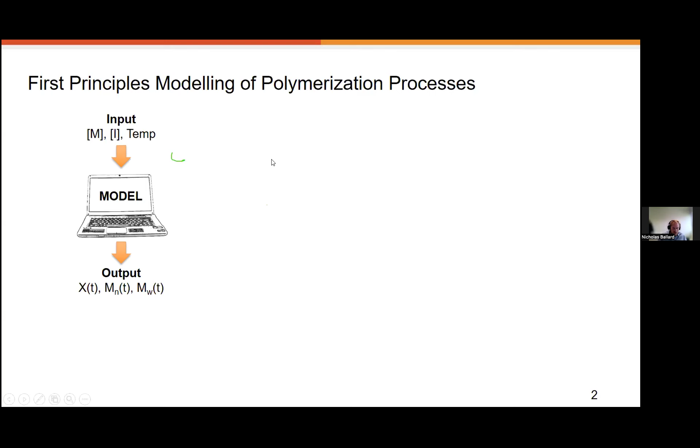And in order to construct this model in the middle here, what we're going to do, oof, I've been too ambitious. There we go. Okay, so what we're going to try and do is first get an understanding of the chemistry. Okay, so we have, in this case, free radical polymerization. We know that it takes place with initiation, propagation, termination. We put together this little reaction scheme. And then on the basis of the reaction scheme, we're going to construct a mathematical version of this reaction scheme. So in this case, we put together some ordinary differential equations. And then the model is simply solving this set of equations.

Okay. So the beauty of this way of modeling is really that you input everything that you know as a chemist or as a chemical engineer, everything you know about the system, and you end up with a model which is highly constrained to that underlying chemistry or physics.

Okay, so you have a model which is highly constrained. It only has a few parameters. In the ideal case, you say maybe one or two adjustable parameters, which you can then fit to the data. And since you only have a couple of parameters, you only need a small amount of data.

Okay? So the problem with that really is that the model that you have is only as good as your chemistry or physics knowledge. Okay, so if you omit something in the reaction scheme which is taking place in reality, the model is never going to be able to compensate for that. And so that brings me on to the alternative way of modeling, in which the framework is pretty much the same.

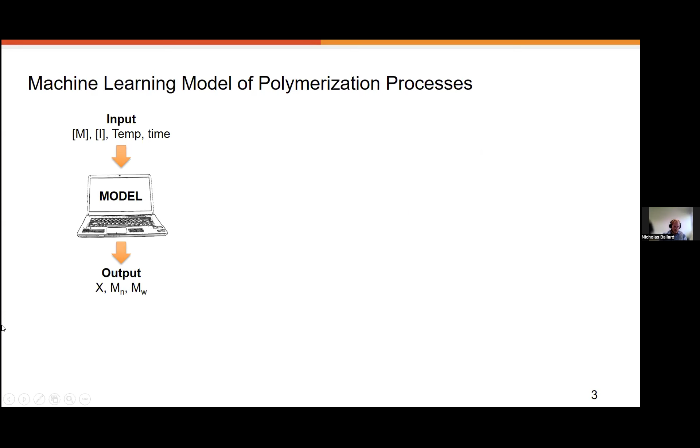So in the machine learning context, you have a model which is basically the same. Okay, so you start off with this initial framework, which is the same as we already saw before. Okay, but the model is constructed in a completely different way. Rather than inputting all of our chemistry or our physics knowledge, here we have a complete black box model. In this case, it's a neural network.

So this comes to the benefit and the drawback of this model: unlike the first principles one, which is constrained to the chemistry or physics that we have, the neural network has no constraints. Okay? It's only constrained to the data. So we have then these two contrasting ways of thinking. The model that you're putting together is trying to do the same thing, but the way in which it goes about it is completely different.

Okay, so in the machine learning world, the idea is more data. With more data, you can have more parameters. With more parameters, you have a more flexible model, and you can fit anything in this context. Okay, the first principles model, the thing that most of us would have learned during our studies, is to do the complete opposite of this.

So rather than trying to go for as many parameters as you can, this is best embodied by this quote from von Neumann, which says, with 4 parameters, I can fit an elephant, and with 5, I can make him wiggle his trunk.

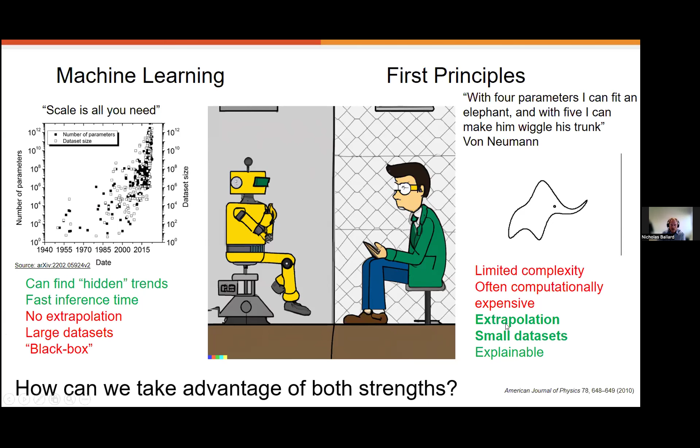And in contrast, the machine learning approach doesn't have these benefits, but it has the benefit of being flexible. It's not constrained to what we know about chemistry or physics. It can adjust depending on what it sees in the data. So when we started working on this problem, what we tried to do is look at how we can take advantage of the strengths of these two different types of modeling, whilst avoiding the weaknesses. Okay, so how are we going to do this?

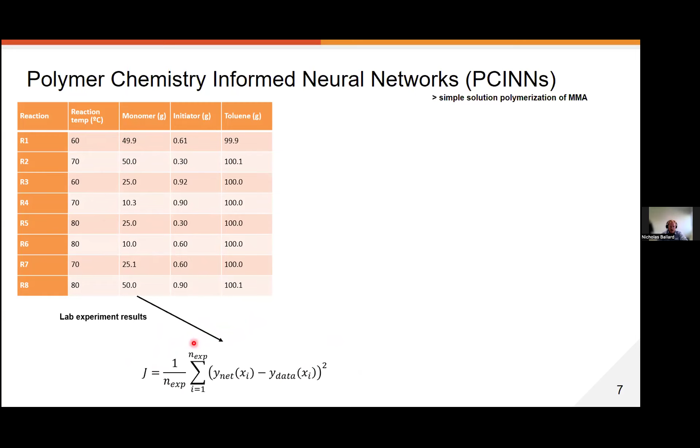But at the same time, we're going to constrain the neural network so that it also has some understanding of the underlying chemistry that we have in place. So we put together a first principles model, and on the basis of this first principles model, we can then extract certain information about trends.

So for example, we can say when we increase temperature, normally we would expect conversion to increase and we would expect molecular weight to go down. And the same thing with initiator concentration. When we increase initiator concentration, we expect conversion to go up and we expect molecular weights to go down. When we increase monomer concentration, we expect molecular weights to go up. So all of these kinds of trends that we understand from the underlying chemistry, we can then incorporate in this second term here.

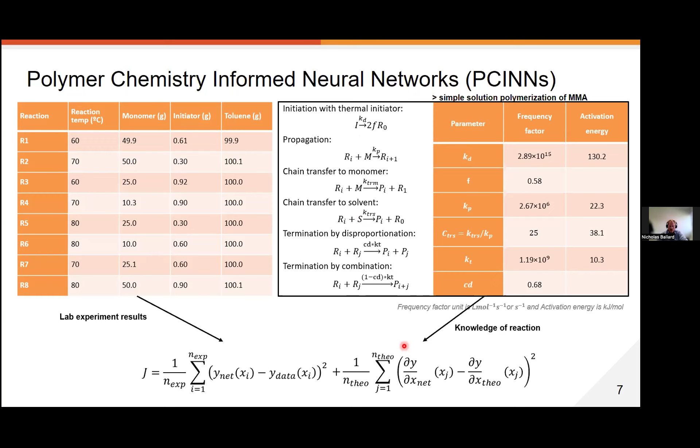So this second term says the neural network doesn't just have to fit the data, it also has to fit the underlying trends that we know should be occurring based on the chemistry that's in place. Right then, so what we did, we take this neural network. The neural network has as input monomer concentration, initiator concentration, time, and temperature. Okay, so these are the process variables that we know are going to affect the outputs.

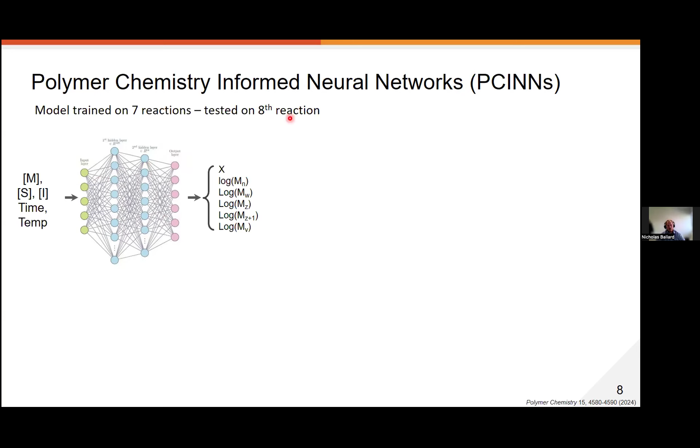And then we're going to use these process variables to try and predict conversion and the moments of the molecular weight distribution. Okay? So what we do is we take 7 of the reactions and we use them to train this network. And then we test the model on the 8th reaction, so the reaction that it's never seen before. And when we do that, what we can see is quite a nice result.

Okay, so to sum up this part, basically what we have is a system where we take an imperfect model. So it's a model where we have some understanding of the chemistry, but perhaps the parameters that we know are not 100% correct, or perhaps we've missed something in the chemistry. So we take this imperfect model, we combine it with a limited data set, and we can construct this polymer chemistry informed neural network, which offers better predictions than either a data-driven or purely theory-driven approach.

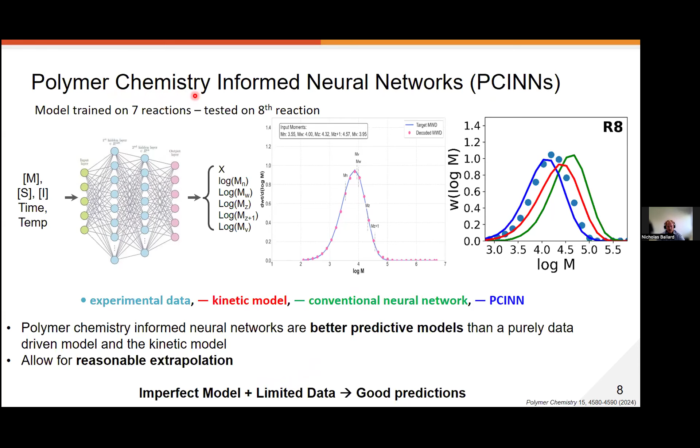Okay, so then moving on from there, one of the other main approaches that we've been trying to use in this machine learning story is to really try and take advantage of the much faster inference time of these models. Okay, so typically when I put together a first principles model, I'm happy if it runs in a minute. If it runs in 10 minutes, it's okay, but occasionally it might take an hour or even a day to run these first principles models. Polymer chemistry systems are very complex. They involve big distributions, and can take some time to solve.

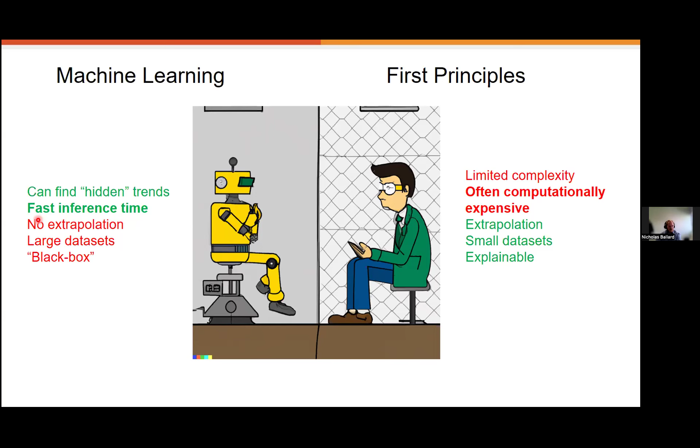In the case of machine learning, a neural network, one single pass through takes place in a fraction of a second. Okay? So in this second part of the talk, what I'm going to try and focus on is where we can leverage first principles models to generate a machine learning model, which can offer some advantages, particularly in terms of inference time. And one of the problems that we've been using this approach to try and address is in control problems. So particularly for online settings where you need a response immediately, and with the first principles models, it's simply not possible.

So let me give a little overview of the typical setup that we have. This is a problem that we've encountered over the course of a number of years. We take a measurement from the reactor, and then we want to use a model to say, okay, what's the control action that I should take in order to optimize my final product? So I'm at a certain point in the reaction. How should I change the temperature or the monomer feed rate or the CTA concentration right now in this moment so that the product that I get at the end is going to be the optimal one? So it's a problem because, like I said, first principles models can take a minute, 10 minutes to solve.

And when you're doing this kind of optimization process, when you're trying to optimize which actions you should take, it involves running the models multiple times. So since the models are computationally expensive, this can take much longer than the reaction itself. So you end up solving an optimization problem which takes a few days to solve, but by that time, the reaction is already finished.

So there's two basic approaches to this. The first one is to accelerate the model. So if you have a model which can be run in a fraction of a second instead of an hour, then this will contribute to solving this problem. And the second one is to accelerate the optimization. So if you can make this decision faster, then it allows you to really do this in real time.

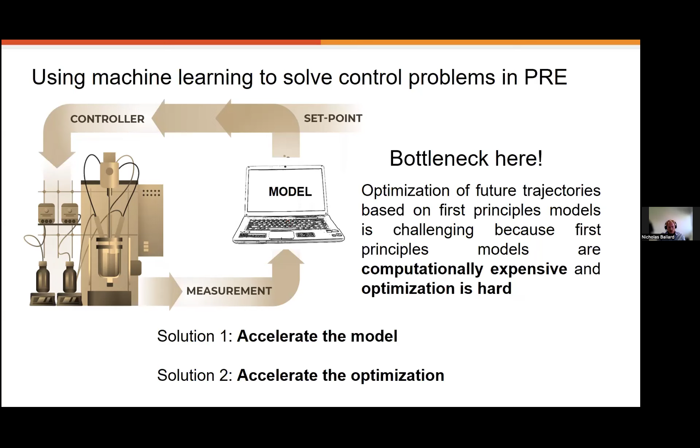So the second alternative that we have is to accelerate the optimization. And what do I mean by this? Effectively, what we have in our system is we take some sample, some information from the reactor, and we want to use that information to output what the optimal control action is. So in the normal case, like I said, this involves solving a relatively complex optimization problem using a first principles model, which is very slow. So in general, it's a very slow process.

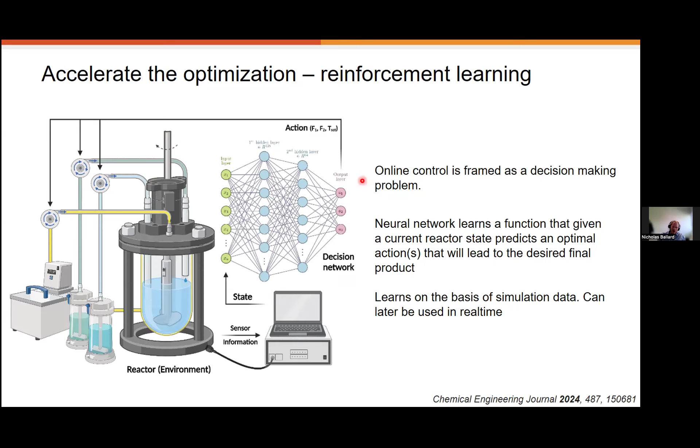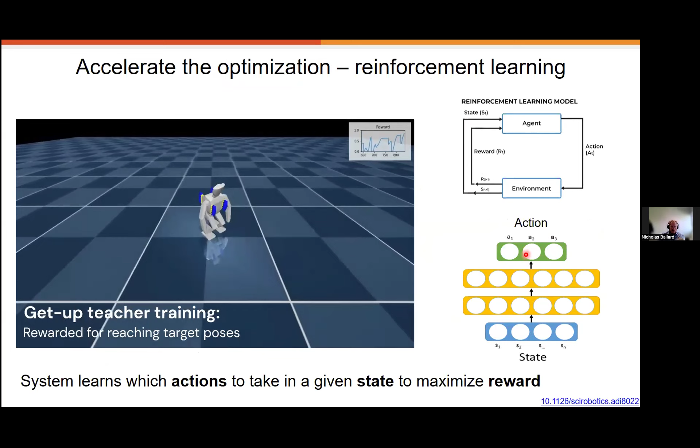So let me give you a little example here. This is an example from the literature where they try and teach a robot how to walk. Teaching the robot how to walk basically involves this robot having information about the current position of its limbs, and it needs to then make a decision about which actions to take. So if it's trying to learn how to walk, it needs to know that you can't move both legs at the same time. First, the left leg needs to go, and then the right leg needs to go.

So the process here becomes one in which the system is constantly interacting with the environment. It's constantly receiving information about the position of its limbs, and it constantly makes decisions about what to do next. And when it takes a decision which it sees is good, so in this case, for example, it's trying to learn how to score a goal in football, when it makes an action which results in a goal being scored, it learns. The parameters in the model are adjusted so that in future, that same action is promoted.

So in that way, the positive actions that are taken are reinforced. So it learns to repeat those actions when it's in a similar state. And the negative actions, which result in it falling down or something like that, are then prevented in future. So it's a process of constant iteration where the model is interacting with the environment.

In this case, it's this simulation of the robot, and over time it is learning which are the actions that I need to take in order to optimize my end goal, which in this case is learning how to play football.

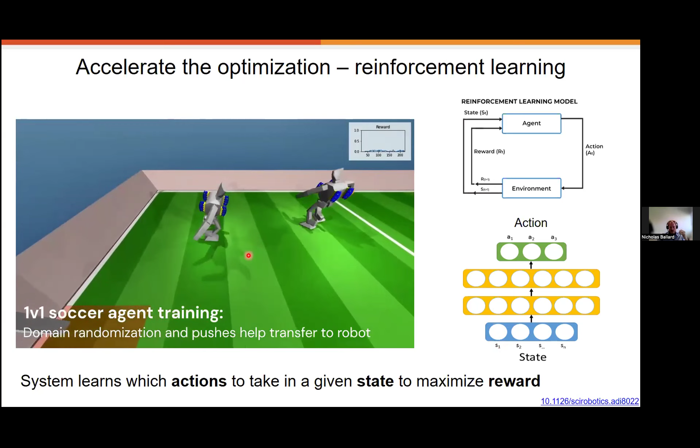Okay, so we're going to set up the same thing in our polymerization system. So what we have is an emulsion polymerization of butyl acrylate. Okay, so this is what's going on in the reactor here. And at certain times, the system is going to receive information about the state. So the state of the reactor in this case, in terms of conversion, the amount of monomer fed, the molecular weight distribution, which we approximate by a method which I'm not going to go into detail here.

And it then has to learn which actions to take in terms of the monomer feed rate, initiator feed rate, and reactor temperature. And it's going to learn which is the optimum action to take on the basis of matching the final target molecular weight distribution, which is this one here, which we obtained from some reference process. And it's going to try and do so whilst minimizing the reaction time and ensuring that the reactor is in safe conditions. So in this case, this is simply avoiding very high levels of monomer in the reaction.

Okay. So like I said, we have this process of constant interaction with our simulated environment, so our simulation from the first principles model. And at the beginning, the system doesn't know which actions to take, so it's making very bad decisions. For example, it's deciding to never feed in the monomer into the reactor, and then you never have any molecular weight distribution. Or it's feeding all of the monomer in at the same time. Concentration of monomer in the reactor goes so high that it becomes dangerous.

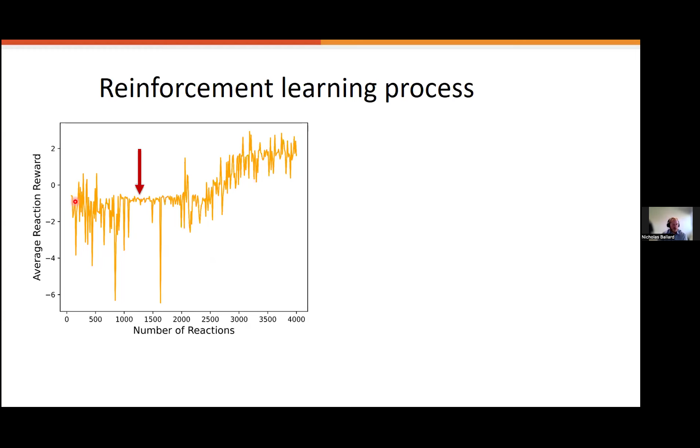Okay, so towards the middle, it starts to learn how to put a series of temperature and monomer feed rates into the system so that the molecular weight distribution that we target is approached. And by the end of the training, so after a large number of simulated reactions, it really learns an optimal control strategy, which both gets the molecular weight distribution that we want, but also does it in optimum time. Okay, so the original molecular weight distribution for this process was obtained over the course of 4 or 5 hours or so. And in this optimal control process, the system has learned autonomously to do it 50% faster than that.

Okay, so that's all I have to say. So what I've tried to do is give a kind of overview of where we can use machine learning, leveraging the first principles models that we have. Hopefully I've shown you that we can use these to make good predictive models, which are not only constrained by our underlying chemistry, but also have a data-driven component. We can use them to accelerate computation, so we can make machine learning models that are very close to reproducing the first principles models, but orders of magnitude faster in time. And we can also use them to solve very challenging control problems using this reinforcement learning approach that I've discussed at the end there.

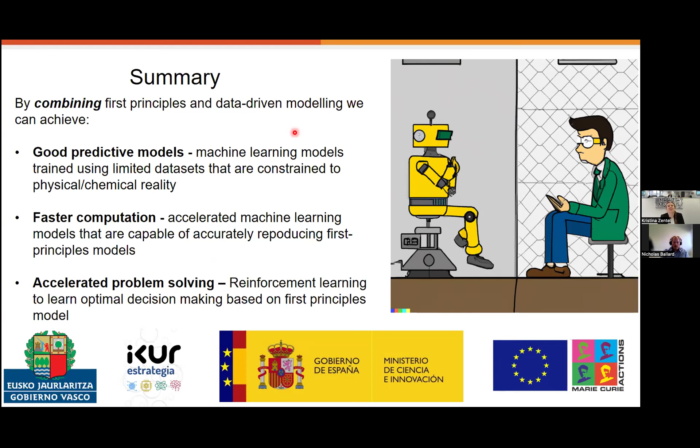No, in this case, we're just using the output from the simulation. Maybe if I can go back on this. So it's one of the things that we're looking at trying to improve now. For example, if you look at the x-axis here, this says that we need 4,000 simulated reactions in order to reach the optimum control strategy. So 4,000 simulated reactions in this particular case, it really takes quite a long time to learn the optimal solution. Once it's got there, it's rapid. It can be implemented fast, but it takes a long time to get there.

So one of the things that we're looking at is using, for example, machine learning systems in place of our first principles model. So in that way, still there will be 4,000 simulated reactions on the x-axis here, but in terms of time, it will be orders of magnitude improvement. So this training process, I think, takes a few days, but we could probably decrease that to a couple of hours if we implement some of the other ideas that I showed in the talk at the same time.

Yeah, really, really nice. So if you use this trained model now and you give it a different molecular weight distribution, will it again need 4,000 reactions to learn, or will it then be faster? No, the same. It will need to be trained from scratch again. So it will again take a few days to train from scratch.

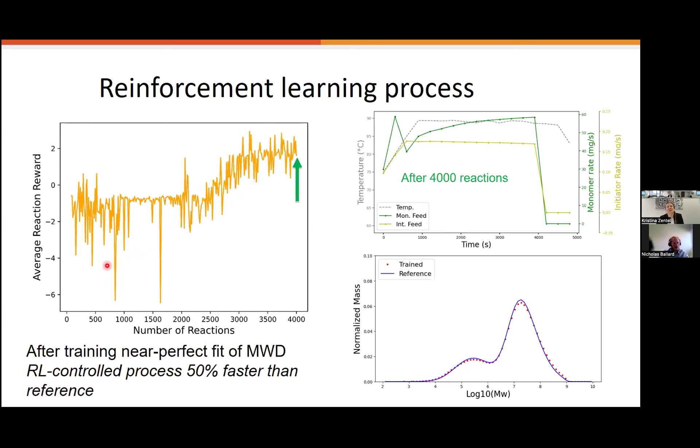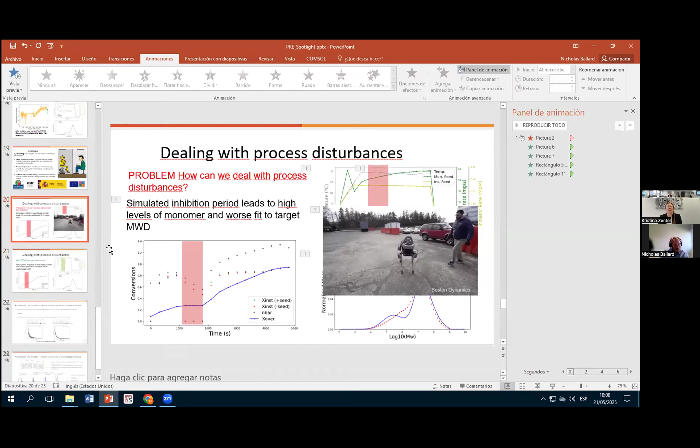Yeah, I have a slide on this, but let me see if I can. Okay. You can see the slide now? Okay, yes. So let me go back here. I'm gonna unhide these. I didn't deal with these for time, but

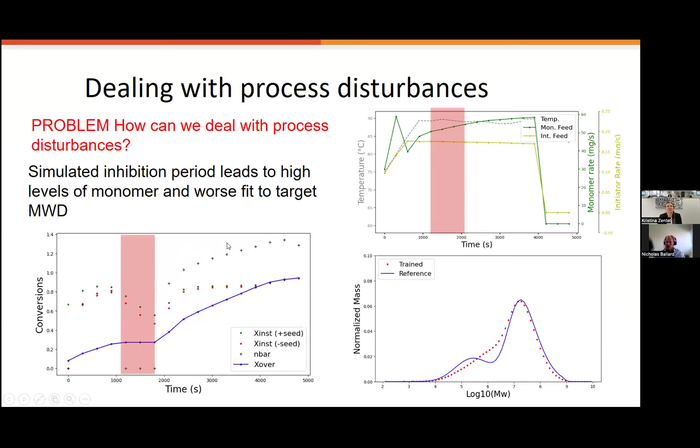basically in the form in which I've shown it in this presentation, it wouldn't be able to. So it learns based on what it's seen in the past, and if it never sees those process disturbances, when it gets exposed to them, it also makes bad decisions. So in this case, when we've never exposed it to any process disturbances, we simulated in the middle of the reaction here a little bit of inhibition, and the system didn't make any change to the control strategy. So it didn't respond properly.

Then the next question has maybe already been targeted a bit. Sebastian Fries is asking, how flexible is the reinforcement model when the starting conditions of the reaction change? Yeah, so again, if it's never seen that during training, then it struggles to adapt to those kind of things. It's kind of a good and a bad thing. Once you know which kind of things you want it to be able to learn to overcome, generally it can do that. So in another example, we expose the system to different initial seed.

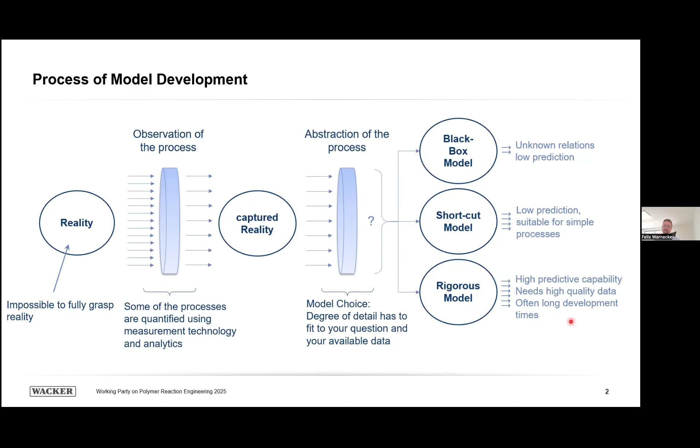Yeah, this is a rough categorization of models. I think we have heard today that there are also other options with artificial intelligence. I want to talk about first principle rigorous kinetic models, which have in general a high predictive capability. But if you want to train these models and have valid kinetic parameters, you need a lot of high quality data, and often you have a long time to develop these models.

So if we take a look at a typical model abstraction for emulsion polymerization, you will at least have these sub-processes here. You will always have an aqueous phase and aqueous phase kinetic reactions going on here. You will also have your polymer kinetics in the particle phase. And these phases are connected by different diffusion processes, for example, for the radicals or oligomers, and in addition, phase equilibria, which distribute, for example, the monomer over the phases.

So in general, emulsion polymerization is a complex process, and you will always have a lot of sub-processes and therefore a highly complex model. Today, I want to talk about the radical formation in the aqueous phase. So this was the focus of our project, to have a better prediction for this part here and to successfully embed this in already existing thermodynamic kinetic models we develop.

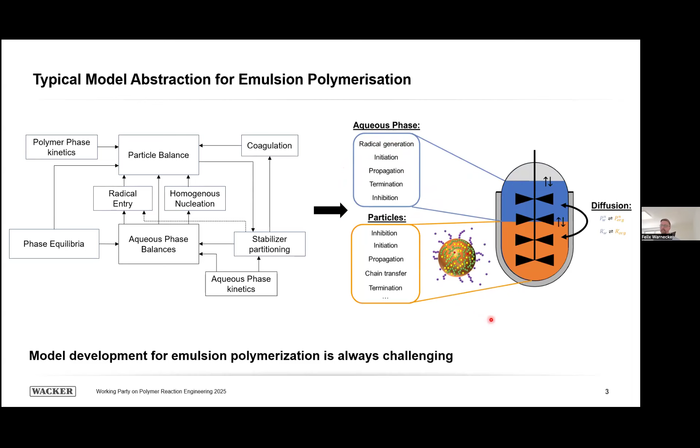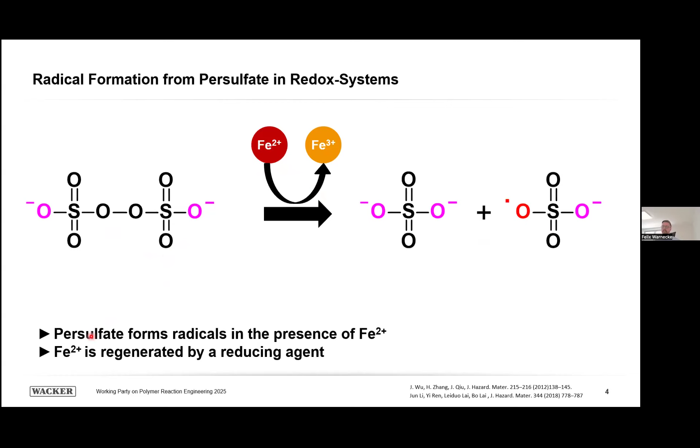So now coming to our example. The redox system has mainly two parts. The oxidation step, so the persulfate reacts with iron to form radicals. This is a reaction running very quickly. And to keep this reaction running, the iron has to be regenerated by a reducing agent.

A commonly used reducing agent is ascorbic acid. Ascorbic acid is a very complex molecule. You will have a lot of complex intermediate steps. So this is here just for simplification to talk about the modeling. But in general, if you take a look at the literature, you will have at least two regeneration steps for iron by ascorbic acid.

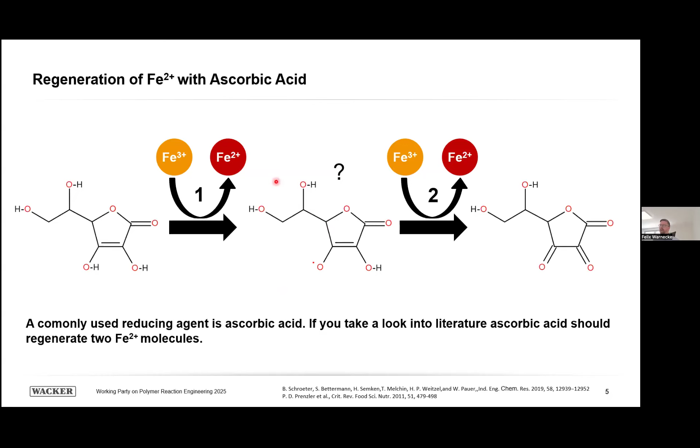So our first model candidate that we wanted to test was this oxidation reaction in combination with the regeneration of iron from ascorbic acid, followed by further consecutive steps of our already existing kinetic models. So we have these three reactions here, oxidation and two times regeneration, and we tried to do some experiments to get access to these kinetic parameters. In a first step, we started with aqueous experiments.

So we tried to reduce complexity from the emulsion system, and we wanted to get access to the composition of the initiator components. So we prepared an aqueous solution of potassium persulfate with iron, and at some point we added the ascorbic acid, and with Raman spectroscopy we could track the consumption of these components, as you can see here in the figure. To get access to the signals, we had to work with increased concentration levels, so in the range of 1 to 3 weight percent of potassium persulfate in an aqueous solution.

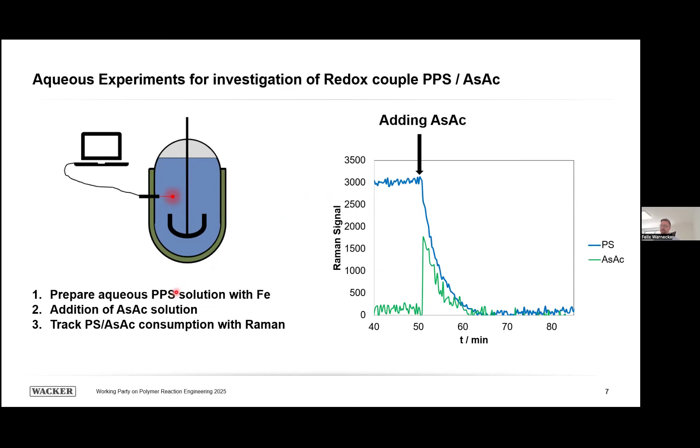In the next step, we did some variations. For example, we did a variation for the iron concentration. As you can see here in the figure, this is the consumption of the persulfate. The redox system will speed up if you increase the concentration of iron. Another observation is that if you increase temperature at a fixed iron level, the reaction will also strongly speed up.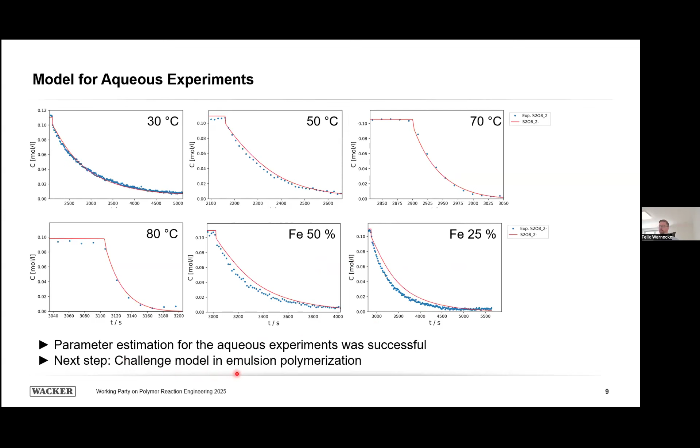Therefore, we switched to an emulsion polymerization system with vinyl acetate as monomer, PVOH stabilized, and we developed a recipe with a solid content in the range of 55%. The drawback now is that we have no more direct access to the initiator components because the concentration level of the initiator is simply too low. So instead we can track the monomer conversion in form of the solid content in our case. So we still wanted to stay at our initial model and take a look how it performs.

But first, one thing I want to mention is that data quality is extremely important if you want to do kinetic modeling. So in order to get access to the monomer conversion, we had different approaches. One approach is to set up an energy balance and calculate the heat of reaction and convert it into a solid content. So we did this energy balancing for our 2-liter lab reactor.

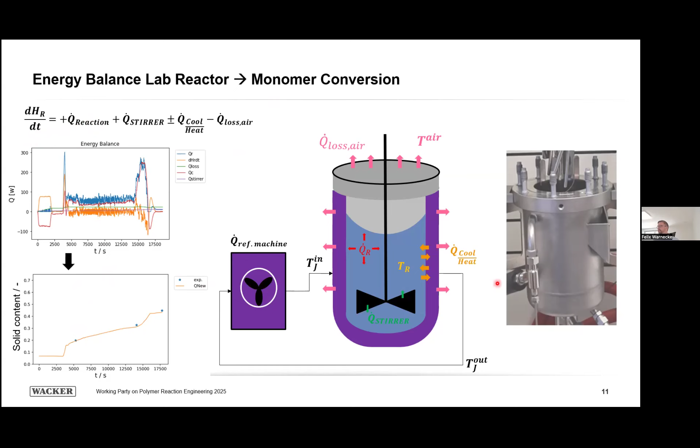Another way to get access to the monomer conversion is again Raman spectroscopy. So as you can see here, the signal of the vinyl acetate monomer is shown here, and the signal of the vinyl acetate in polymerized form is shown here. In the intermediate range of conversion, we have overlapping peaks. So this is not a perfect situation, but it still is working quite fine.

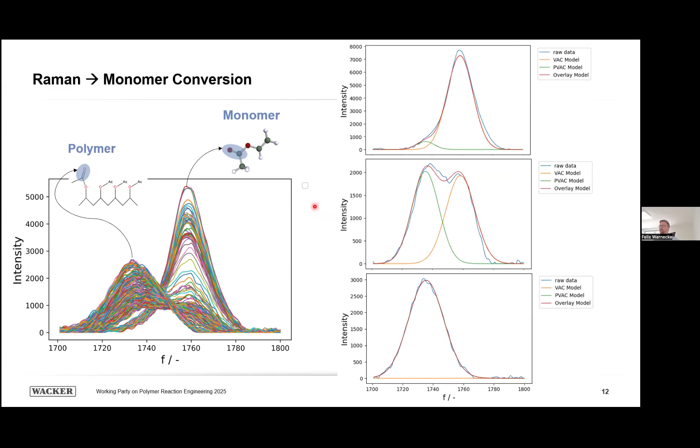So again, data quality is extremely important if you are doing kinetic modeling. So I recommend you should always validate your experiments and check for the quality before you start with a modeling project. So what you can see here is the solid content from different sources. In blue, you can see the Raman signal. Green shows the energy balance. And these orange stars are an offline sample where we analyzed the solid content by weighing and drying the samples.

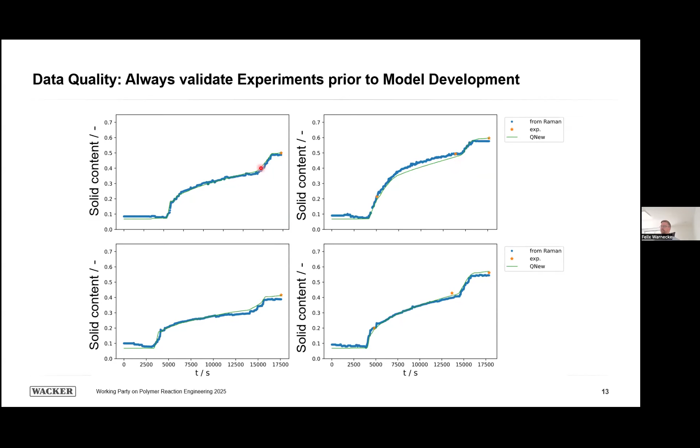So now coming to the experimental results of our variations of the redox system in emulsion. And the first, a little unexpected result is that if you increase the iron concentration in your system, you will see a strong decrease in reactivity. And our interpretation for this is that iron has a negative impact on the radical efficiency. And if you take a look into literature, you will find the assumption that iron 2 is not only working in the redox system to speed up your redox reaction, but it will also destroy your sulfate radicals. So you have to choose the concentration carefully.

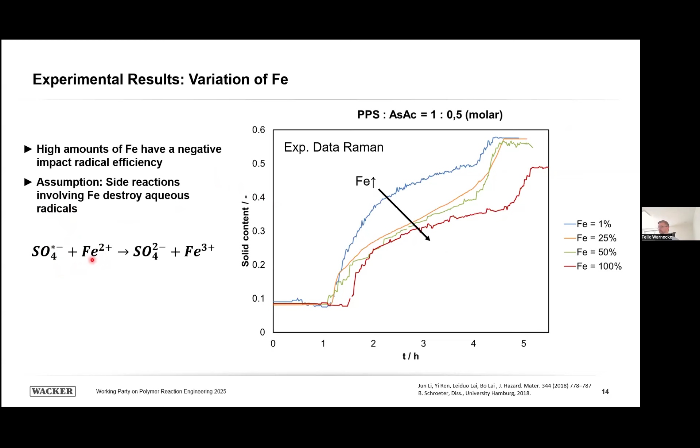And another observation was that if we increase the ratio of ascorbic acid compared to the persulfate, so not the stoichiometric ratio, but go away from this for lower ratios or for higher ratios, we will also see that an increased amount of ascorbic acid has a negative impact on the radical efficiency. So the question is also, why is this happening here? So we did some variations, collected some data, and then we started the first modeling approach.

And here you can see this is the stoichiometric ratio for persulfate and ascorbic acid, at least related to these equations here. And you can see if we adjust the kinetic constant for the radical losses, we can describe the solid content here with the blue line quite fairly. But if we change the ratio of persulfate and ascorbic acid, the model strongly fails to predict the solid content. So here we have an under prediction of the solid content with low amounts of ascorbic acid. And for high amounts of ascorbic acid, we have an over prediction of the solid content. So our model fails and we had to revise our assumptions.

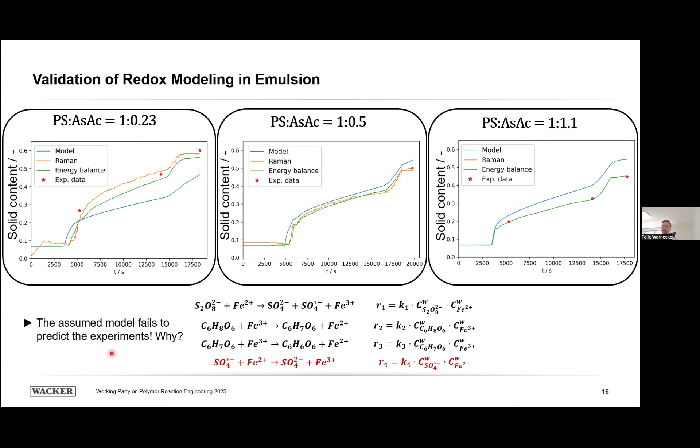And if you take a closer look in the literature, you will come to the point that ascorbic acid is more complex, and it seems like the degradation products of the ascorbic acid, for example, the oxalic acid, but it can also be some other component, we don't know that for sure, will also act as a reducing agent, and so we have further reducing potential here if we add 1 mole of ascorbic acid. So our approach was to add another generic reaction to depict this observation here.

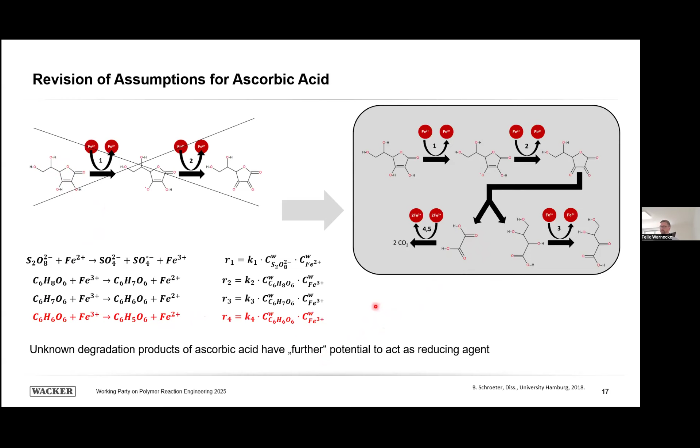Another unexpected observation was that we have also tried to do some thermal polymerization with potassium persulfate, and the reaction was running quite okay. The start was not that fast, but once the reaction was running, the batch with thermal decomposition of persulfate was running quite fast. And this was in contrast to the literature constant, because we have also tried to simulate this before with the constant from literature, and with this kinetic constant, there was nearly no solid content formation, because the literature constant says that the decomposition is very slow.

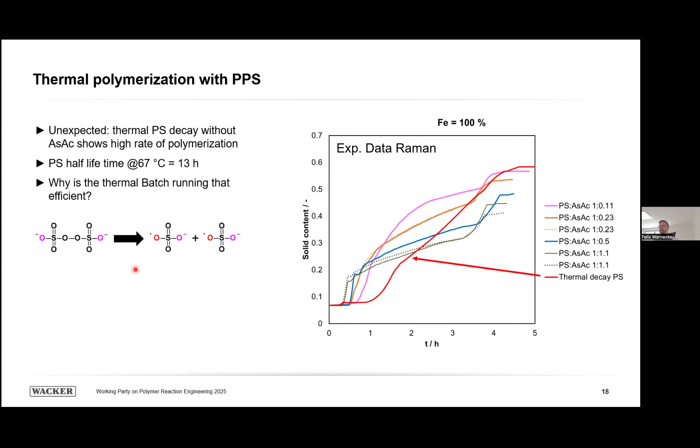So we took a closer look at the thermal decomposition as well. So this is here the kinetic constant from literature for the thermal decomposition. So for low temperatures, it is really very, very slow. You will have to wait for hours to get a conversion of the persulfate. And we tried to validate this kinetic constant with our aqueous experiments and checked that it was okay. We did these experiments at 90 degrees and we could validate the kinetic constant from literature.

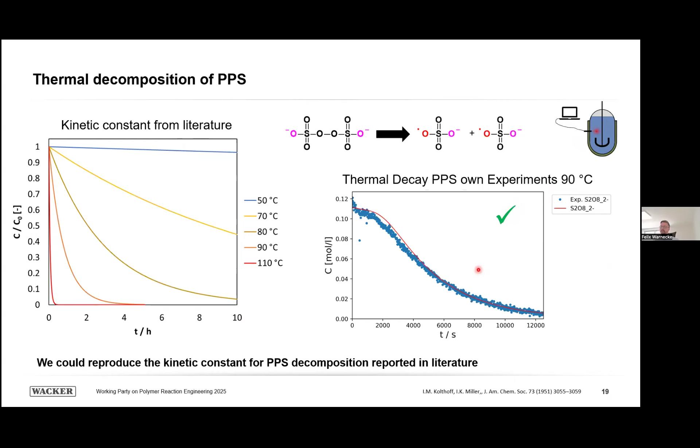And if you take a look into literature, we are not the first ones who have observed this phenomenon. For example, at 50 degrees C with vinyl acetate, in literature it's reported that the thermal decomposition is 50 times higher than the constant for aqueous solution without monomer. So this is in good agreement with what we have observed.

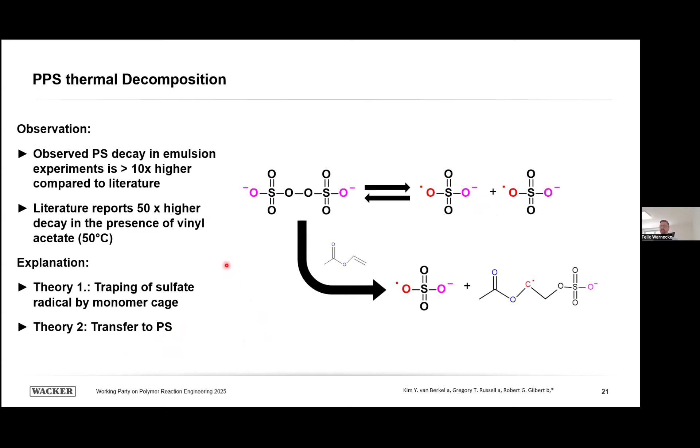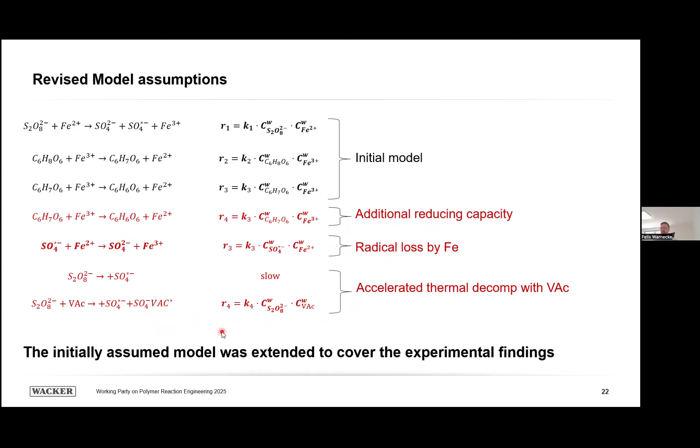So we had to revise our model again. Our initial model with the 3 reactions was extended with 1 reaction with additional reducing capacity for the ascorbic acid. We also had to add these radical losses by iron. And additionally, we also had to add the accelerated thermal decomposition in the presence of vinyl acetate. And with these new assumptions and the strongly more complicated model, we were able to regress kinetic parameters that can fit different observations for different persulfate to ascorbic acid ratios and also the thermal decomposition.

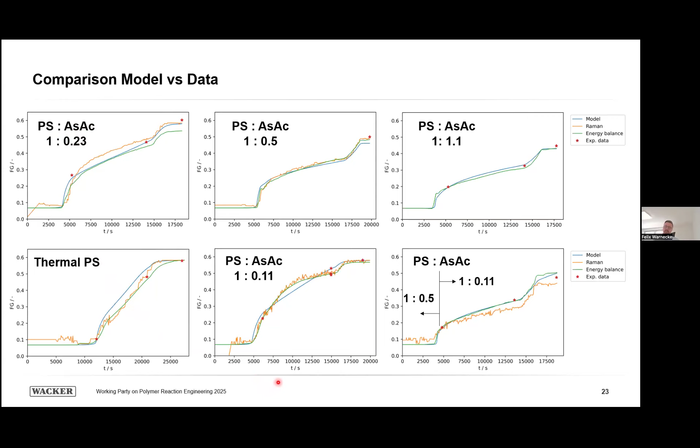So this is a first step. We could describe a couple of observations. But of course, we are not done here. There's still a lot of things to do. But I hope I could show you that the initiation in emulsion polymerization is a complicated topic. And our opinion is that in literature, it is often not really treated with the appropriate importance because it has a really strong impact on your process. And we think that understanding the initiation is essential for the model development because you will always have this interaction with all your other kinetic parameters.

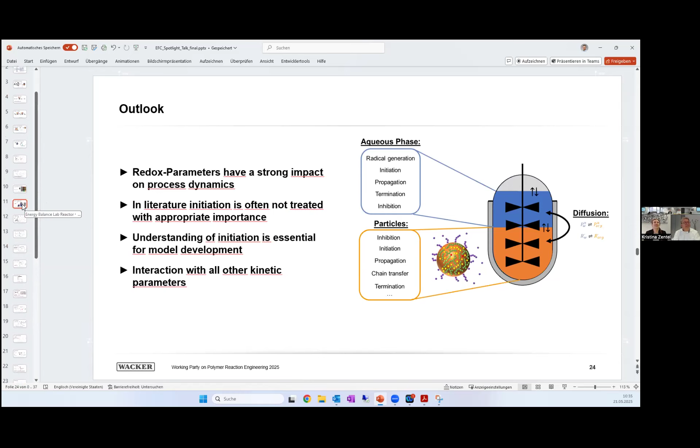In the meantime, I'm interested in having a first question myself. I really liked how you put effort into validating your experimental conversion with the different approaches. You showed the energy balance as well as the Raman results and also the overlapping of the peaks. I was curious how you dealt with that, because I think the results are in very good agreement with the energy balance model and also the offline analytics. Maybe you can elaborate a bit on how you work with the peaks. For the Raman? Yes, this one exactly.

Okay. So we have a lot of spectra here. We take a spectrum every minute, and for every spectrum, we are doing this regression of the peaks to fit the raw data signal with a fixed position, more or less, of the middle of each peak. The optimization has only a very low window to shift the middle of the peak. Okay. So you did a deconvolution of the peaks, right? Yes, from some data we know quite well where the maximum of the peaks is, and this was our reference where the peak should be. So we do not allow the peaks to shift too much, because then you will have some quite strange optimization results. But if they are fixed more or less and can only shift very small amounts, then you will get quite nice results.

Thank you very much. So I think we have a question from Nick. A very interesting approach to a very hard system to try to analyze. Ascorbic acid and KPS by itself is also a redox pair. Is there a reason that the reaction between these two can be ignored?

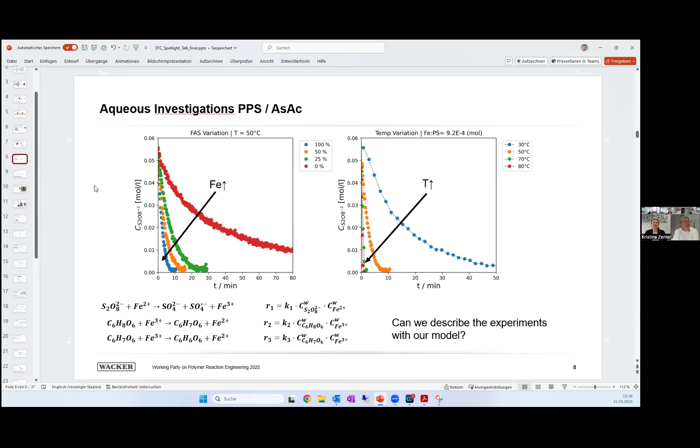If you go back to the spectra you had before, you could see that you have a nice curve with conversion, but you have not a direct isosbestic point, so you have some side effects in between there. But what could also be done instead of the fitting procedure is there are some routines in spectrometer software that do a half band integration from the individual peak maximum towards the baseline. And if you would take the half band to the higher and the lower wave numbers respectively for the individual peaks, it could also give a nice result, because under these circumstances the half bands are free from side effects.

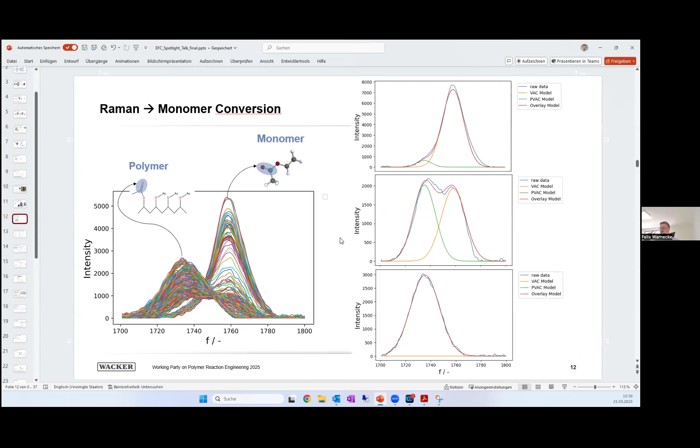Okay, yeah. Thanks for the comment. One thing maybe is important to mention here: with increasing degree of polymerization, both peaks will strongly lose intensity. And what we did here, we were always working with the ratio of the peaks. We have a fitting parameter here, and we're working with the ratio. If we did not do that, we would not have this good information, because fitting for concentrations in emulsion polymerization is nearly impossible. Yeah, that's true. And taking the ratios is extremely helpful.

The other thing you have to watch is that you are still in the linear region of the detector, so that the intensity is not too high when covering a broad range of conversion, specifically in the infrared or near infrared. Sometimes you run into these problems, but it helps if you switch to the next overtone. If you're going too high in concentration, you switch to the next overtone, and the fortunate thing about the overtones is that the peaks diverge, so they spread more; not the peak basis, but the peak maxima move apart from each other.

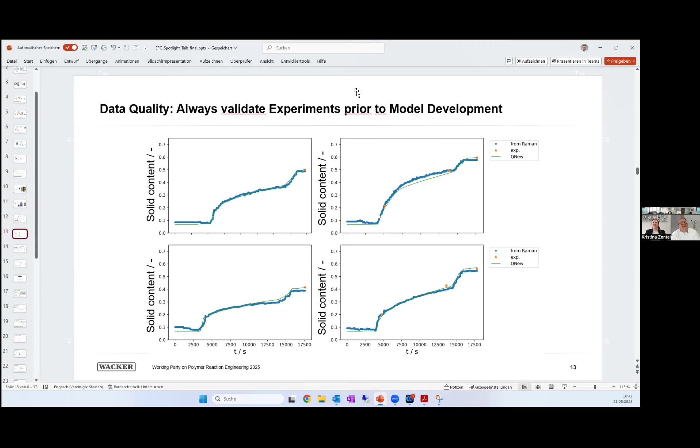Okay. I was working too long in a department with infrared and near infrared spectroscopy. Sorry for that. Okay, so I think we do not have any more questions from the audience.

So Felix, thank you very much for your very nice presentation and the insights into the radical formation and efficiency. You're welcome. Over to the last speaker of today's Spotlight talk, which is Markus Busch. He's working in chemical engineering at the Technical University in Darmstadt, where he is the head of the high pressure polymerization technology labs, working with alpha olefin polymerization, specializing in LDPE, high pressure polyethylene and copolymers. And he will be presenting about bridging the scales in this area.

And so with this, I think we can hand over. Let's share our screen. So now please someone else from the panel can maybe let us know if this is working. Yeah, looks good. Perfect. Thank you. Welcome, and sorry, I'm rushing in late. There are other appointments within the university, but I'm happy to join here

and to talk about how to transfer the scale from the lab to large-scale application. To give you an idea what we are talking about, we can look at this picture. The typical thing in high pressure labs, but also I think in many of your labs, is that the cell size is about 1 milliliter or something like this. So this is a typical high pressure cell. We are running a few mini plants, and here you can see the reactor; the volume is about 100 milliliters.

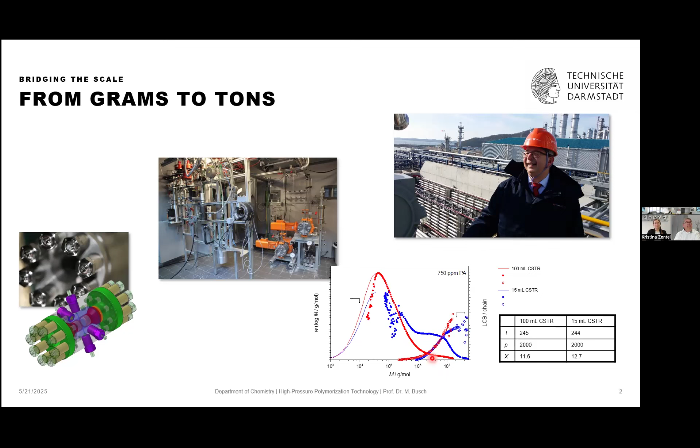And what I'm now starting with is not really a new thing. You see here 3 publications that are reaching back to the past. And the point is with these publications, but I could have also cited Archie Hamielec or Harmon Ray. So these are the fathers of our field, meanwhile, maybe grandfathers. But the basic ideas have been very visionary and they are still holding. So if we are a little bit critical with ourselves, we are all working on old ideas and old stuff.

I'm personally very related to these because my first job interview on a habilitation position was running like that. Do you know these 3 publications? No? Read it. I would like to discuss it with you in half an hour, and that was Karl-Heinz Reichert. And he brought to me the idea about

taking up the idea that on the one hand, polymers are product by process, and on the other hand, the basic idea, the molecules growing do not know about their environment. If we have laboratory experiments, synthesis conditions, a synthesis strategy, or process conditions, we have a kinetic model. It should be the same in any case, and we would get reaction rates, so all the parameters for productivity, we would get molecular properties, and they are the detour to applicational properties. And so this is the basic idea.

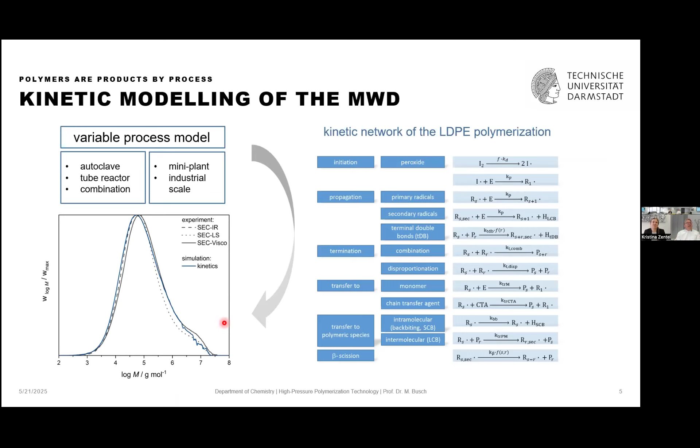But nowadays, more or less all the groups working in that field converged somehow to apply a hybrid of kinetic simulation that is good for the process dealing with ODEs, with the Monte Carlo process as a hybrid on top of that, saving a lot of computational effort by relying on the reaction frequencies from ODE modeling and generating the molecular structure that is again transferred to other models that deal with rheology and application properties.

And the good thing with this is that you have a modular toolbox which you can fit together individually. Here the interface is the reaction rate, here the interface is the molecular structure. If you put the interfaces right, you can also switch in between these models, and it is getting very versatile. On the other hand, it is directly following the old idea: reaction kinetics are generating structure, and the structure is generating applicational properties, and that's working pretty well.

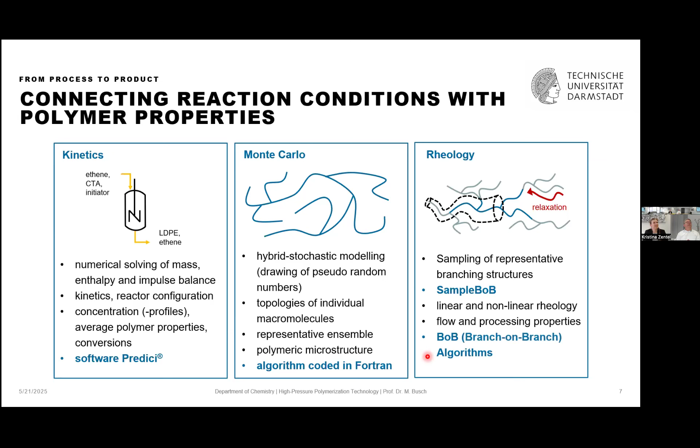And some kind of irony: before, groups were discussing which is the more fortunate way to go. Meanwhile, we are all converging to this approach, and this shows the interaction in science is a good thing, and that we move forward. And that this is not only a dream and a vision, you can see here the molecular weight distribution between experimental data and simulated data.

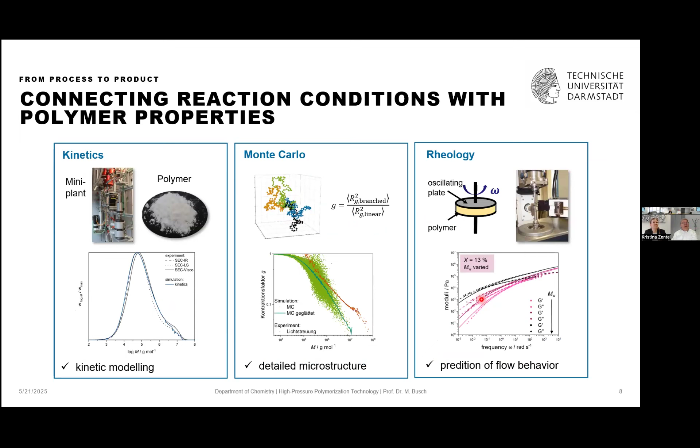You can get into the Monte Carlo process, generating a structure and deriving from that structure the microstructure and application properties, and you can go into rheology and see what is happening there and what application properties are doing. And if you do so, and Kristina is working quite in detail with that, for example, you can have also validations.

So no model is good. Modeling is nice, but it is nothing worth without a proper validation. Otherwise it is just fitting, and for fitting you need a pen and a piece of paper, and that's it, plotting the data points and drawing a line.

But if you validate it in an independent set, then, for example, here you take the microstructure, you take the random walker, you evaluate the space a molecule is occupying, you look for the contraction factor, so the relative space to a linear chain that is occupied with respect to molecular weight, and you can see that you have the Monte Carlo process here, you have the experimental data over here, and you have the simulation over here, and you see you can get it to nice agreement.

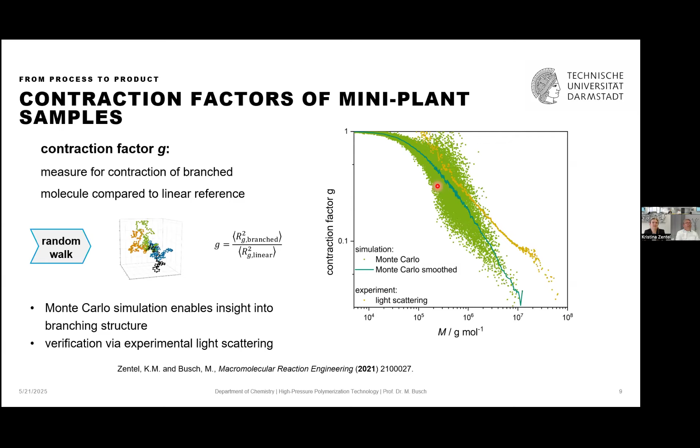And that's basically the very first elementary concept, that if you have a proper model, if you have a proper set of rate coefficients, then you can describe, independent of what you do at different places in different reactors, your application properties or your properties of the polymers, and that's an important thing. So if this is really true, then you should look at different reactor technologies.

And the fortunate thing, aside of that, we have an additional playground, pressure, in our system. We have a technology at hand where two major directions of reactor technologies are implemented. So it's a multi-zone autoclave that's going back to the ICI licenses, and it is a multi-zone tubular reactor that is going back to BASF licenses. And at the end of the day, the nice thing with this is that these two reactor technologies, due to their back mixing characteristics, deliver very different products in terms of application properties.

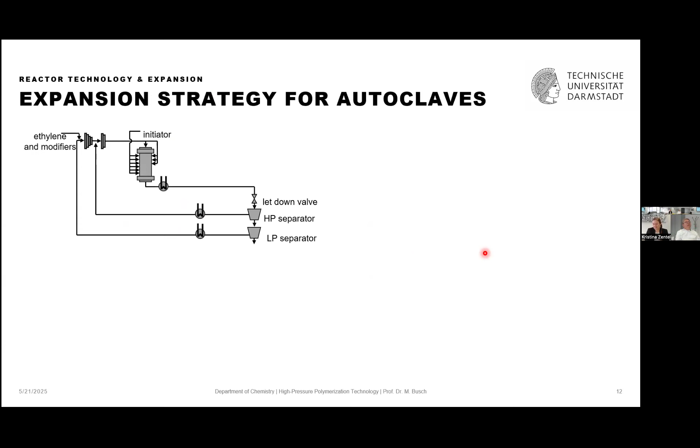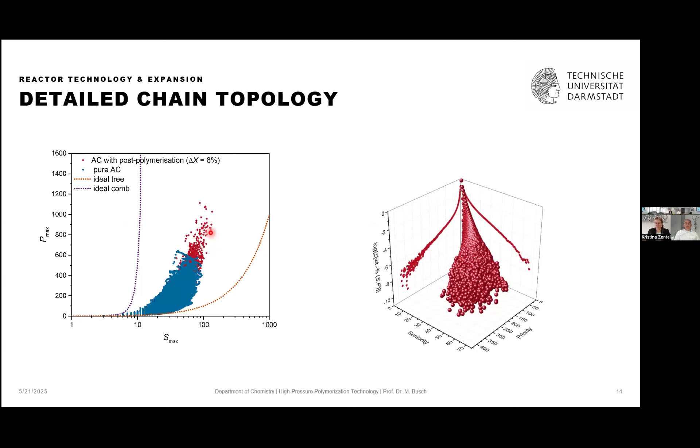But it is a very nice thing to speed up recipe development and recipe adaptation for reactor expansion projects, and that's working fine. So we could be happy at the end of the day, and we could lean back and see, well, the job is done. I'm going to pension. That's all, and see you at the beach.

But the point is, I talked about enthalpic aspects and backmixing aspects that play a role, but I didn't say anything up to now about that. And so the idea is, if this transfer by modeling is working fine, we should be able to study mixing and enthalpic effects on small scale, and then again transfer the knowledge, because nobody likes to play with a 1 cubic meter or 5 cubic meter high pressure reactor and use that as an experimental toy. You can do that. It's quite expensive, and if it's running badly, then you create quite a bit of mess.

But as we were beforehand running these 100 mL reactors, the idea was, well, for mixing things, we should move with the lab scale into the direction of the industrial operation modes. We expanded that in terms of a 3-zone reactor, and the first thing is, well, do we have the right back mixing characteristics? So what shall we do with the reactor inner parts, how should the mixer look, and can we do that? And again, modeling can help.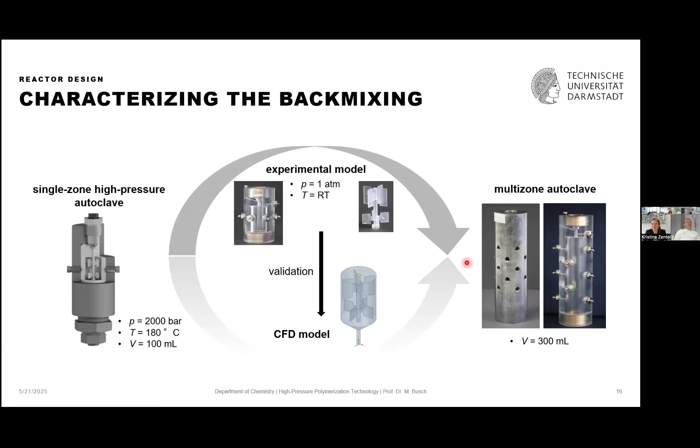So on the top end, you see here the experimental tracer experiment with a color tracer of a pulse experiment with the mixing characteristics, and in the bottom, you see the simulation, and the simulation matches nicely with the experimental data, and it is a 1-to-1 replicate of the conditions on a high pressure autoclave. The viscosity, which is the major determining parameter for the mixing characteristic, has been adapted to the high pressure system, and the geometry is exactly the same.

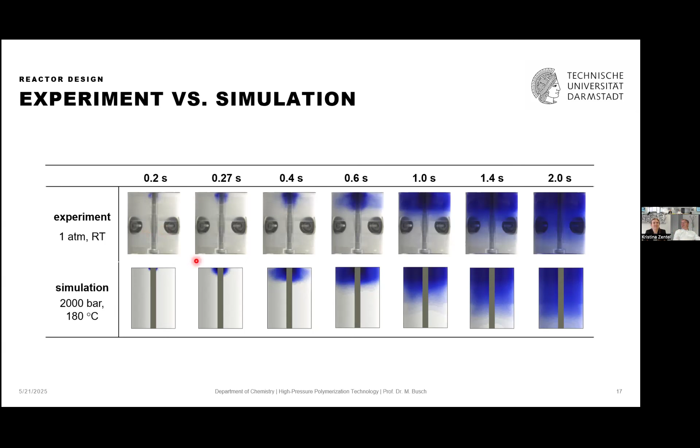The only thing is we build it from PMMA so that we can look inside. We make a transparent stirrer so that we just see the back mixing characteristics. And by this, we have now, for designing and for quantifying back mixing characteristics, a nice tool. And then we can build a high pressure autoclave like this. We can optimize the stirrer in a way that you see here, that zones are well separated, that back mixing, the radial mixing, is working properly.

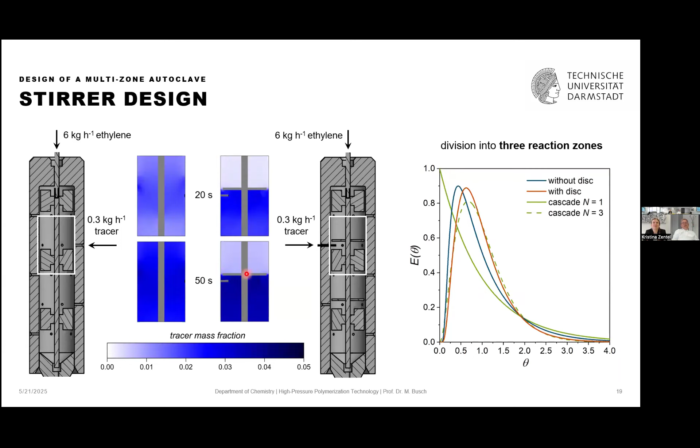So this is what we all did. And then we characterize that all and see that we have indeed a nicely working 3-zone autoclave, well separated. If you don't put in baffles, or baffles in the wrong configuration, it is looking like this. If you're doing it in the right way, it is looking like that. And with this, we are quite happy working with that. And then you can start playing. You can do now similar things.

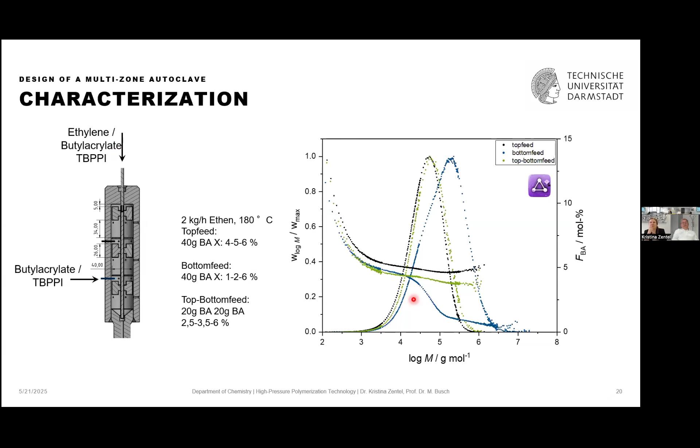Like in industry, you have a multi-zone autoclave. You can feed initiator or comonomers at the top, at the side, and whatsoever. You can keep the zones separated. You can play around with that. And what you can see is that indeed products come out different in properties, and you can use modeling again to understand that, to test if your concepts are right for the back mixing.

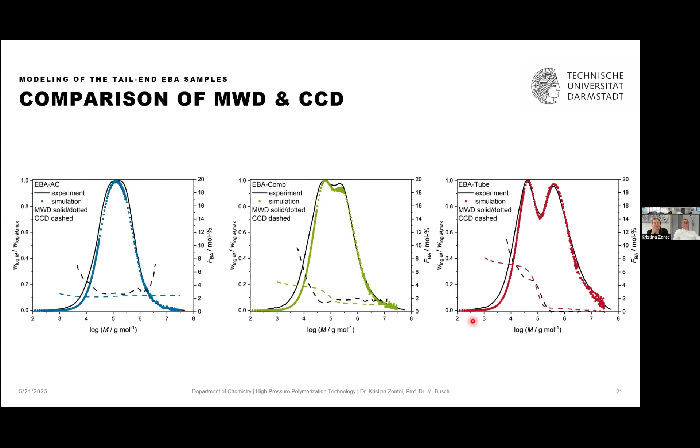And the good news with this is you can do that all with all the degrees of freedom on lab scale, going to the extremes, which you would never do on large operational scale. But if the models hold here, it is likely that the models will hold also in large scale. And you can use modeling again to understand how molecules look.

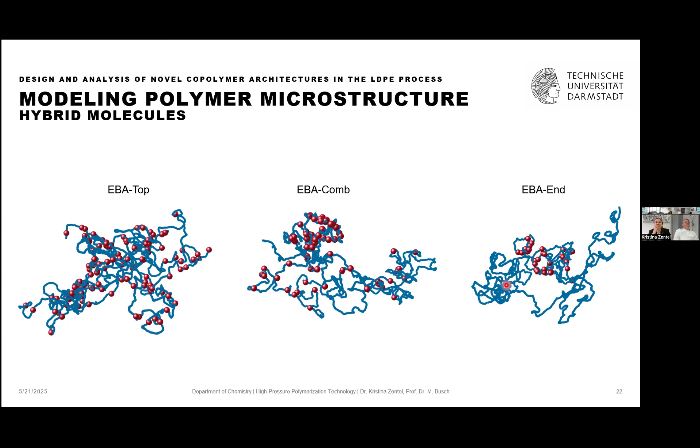So if I feed every comonomer on top, it is looking well and nicely distributed. If I feed it at the side and the top, I find a little bit of comonomer in the core chain and more of the comonomer in the side chain. If I feed it all in the side, I have a homopolymer core and side chain with a high content of comonomers. And by the way, the average composition of these molecules is all the same. So that's how you can access a molecular design of molecules.

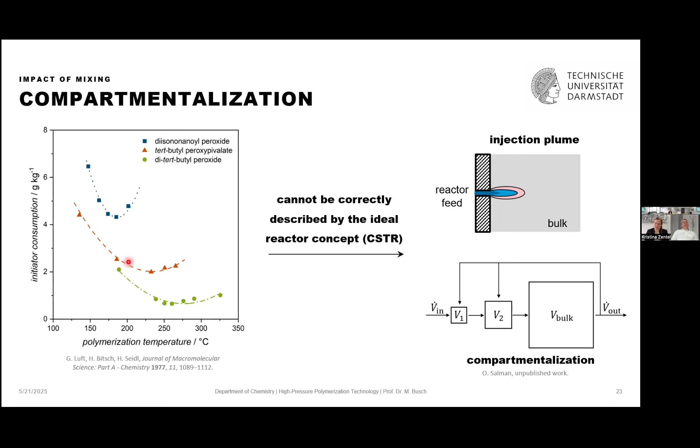You can also go to mixing characteristics, so initiator efficiency. If all is ideal, the initiation process, the mixing process, you would have no mixing-related loss, only the chemical efficiency. But if you have an injection plume, you have primary radical combinations, and this is causing these non-idealities in the initiator consumption curves, this optimum curve, and you can characterize it, you can build up models, you can see whether these models depict in the right manner the control of the molecular weight distribution if you change peroxides, for example, or you can study how peroxide cocktails interfere. This means you can have more productivity, but you can have also interferences.

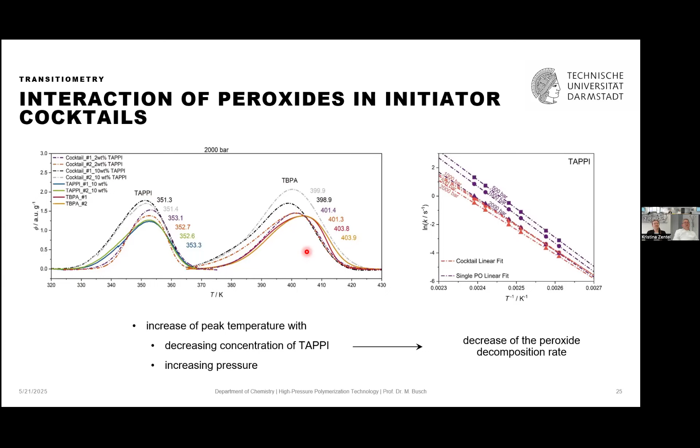Yeah, so these are, I would say, ongoing concepts where we do the transfer, and the next thing is that we go to a more visionary part, and then you have these stories like I have an initial peroxide injection, and I would study what happens here, and do I generate a hot spot in a reactor or not, and what happens with the hot spot, and this is when you drive your reactor to maximum performance.

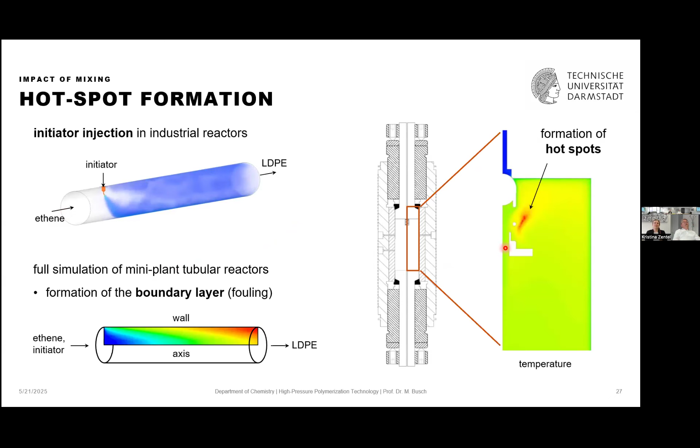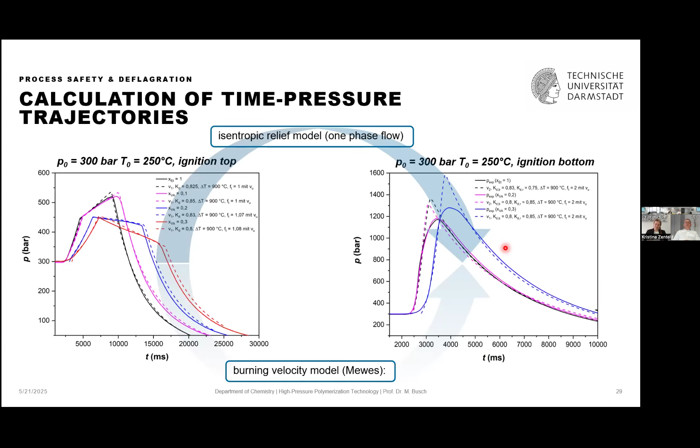You have a description here, you have a description there. You look for the right interface, and if you have identified the right interface, you can link each model to each other, and that's future work. And then you have really a digital twin, not only a digital twin in terms of productivity and operation modes, but also in failures, and that's what the future is about.

This is not all my work, because I'm only the guy who is torturing students with crazy ideas. There are people and there are hands that have to manifest that. These are the hands. This is the group. It is our group. It is Kristina's group. We are sharing visions. We are sharing methodologies in terms of either emulsion or high pressure technology, and the modeling technologies. So these are all the hands that are working on that.

And you need friends around the world, and a few of them are also here in the meeting, that feed you with money so that you can pay your bills, but feed you in terms of challenges, in terms of what is next, where to move to. And this is something that is making work very challenging, but also very nice. And you have a lot of good perspectives.